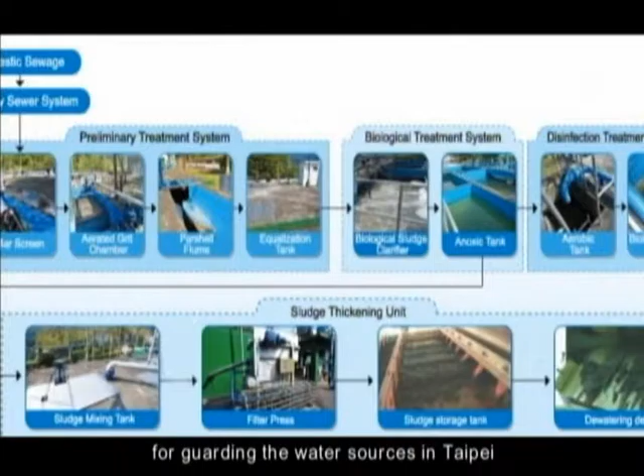However, human activities and civilization imperceptibly impose a burden on natural circulation. Thus, the sanitary sewage produced by us people has to be treated through artificial methods. The sanitary sewer system efficiently collects domestic sewage to have it treated in the sewage treatment plant and restores its cleanness for effluents. The Sindian Wulai area is an important line of defense for guarding the water sources in Taipei.

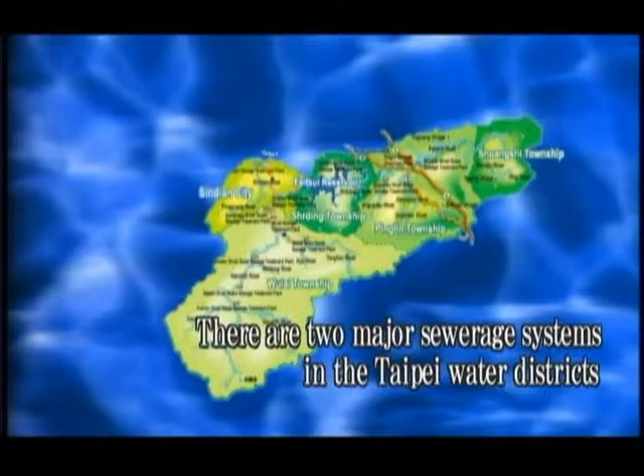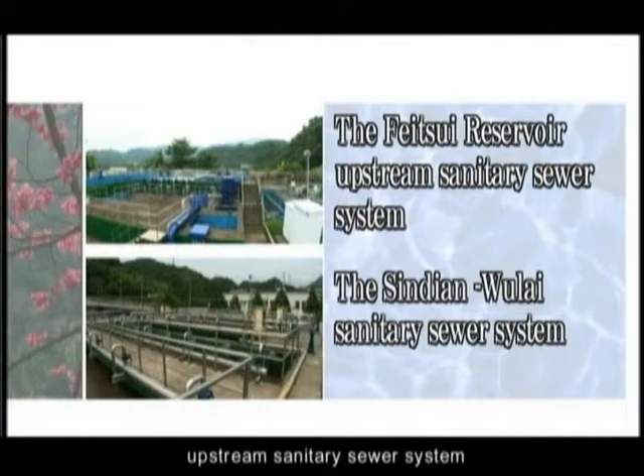There are two major sewerage systems in the Taipei water districts, divided by the Feitsui Reservoir. One is the Feitsui Reservoir upstream sanitary sewer system, and the other is the Sindian Wulai sanitary sewer system.

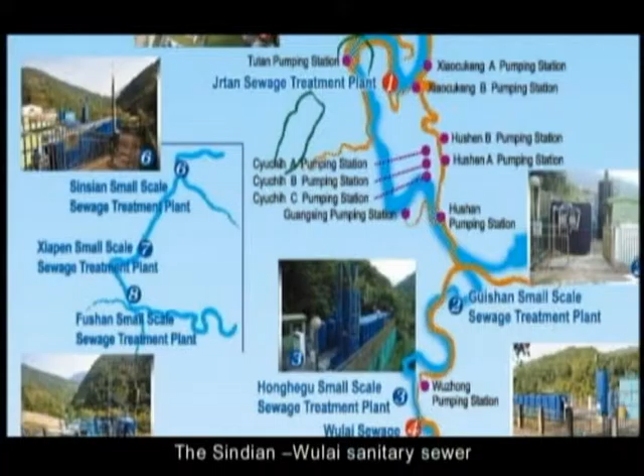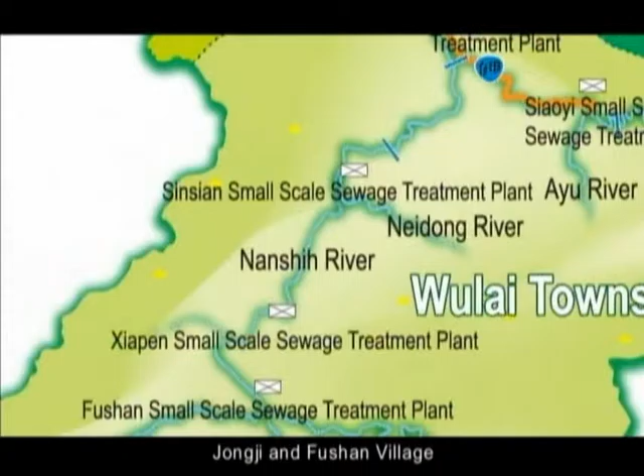The Sindian Wulai sanitary sewer was completed in 1996. It includes several villages in Wulai Township, namely Wulai, Sinsian, Siaoyi, Jongji, and Fushan Village. It also includes some villages in Sindian City, including Tutan, Cyuchih, Cukeng, Guangsing, Guishan, and Jrtan Village. It covers about 38,000 hectares and serves a population of around 16,000 people.

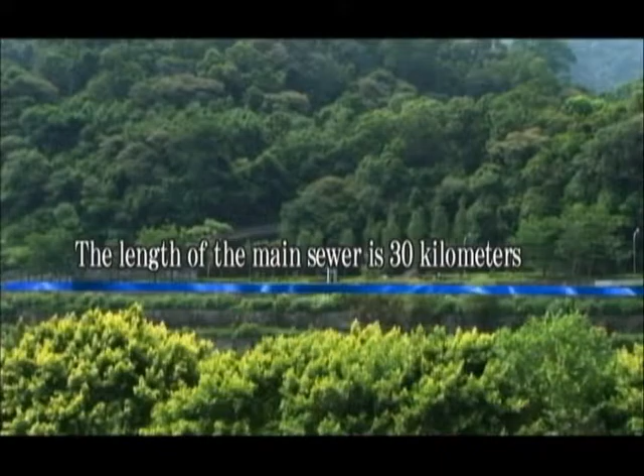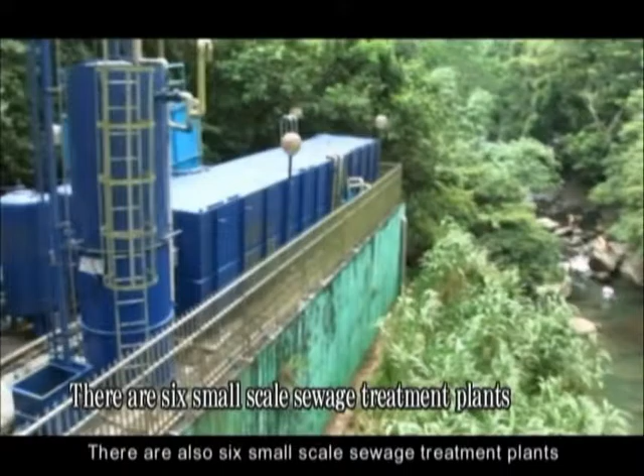Until 2009, the length of the main sewer is about 30 kilometers, and the length of the house sewer is about 33 kilometers. The facilities include 39 small lifting stations, 13 large pumping stations, and 2 large-scale sewage treatment plants. There are also 6 small-scale sewage treatment plants in the remote areas or scattered housing areas.

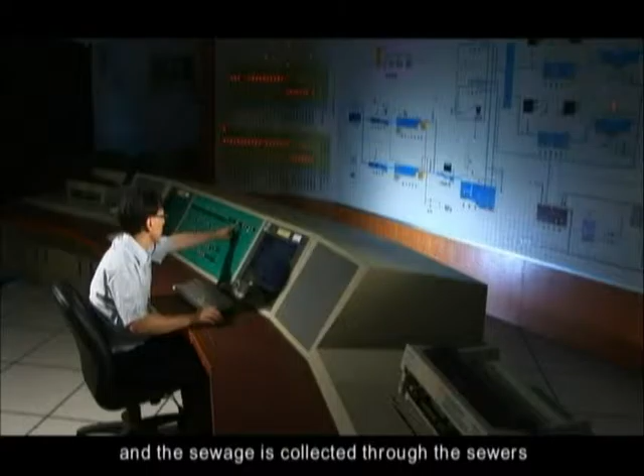The sewage treatment plant has been contracted to specialists for maintenance since 1996. The area covers the residential areas along the Nanshi River, and the sewage is collected through the sewers and is sent to the sewage treatment plant for treatment. After being treated in the secondary sewage treatment plant, the water regains its clarity from muddiness.

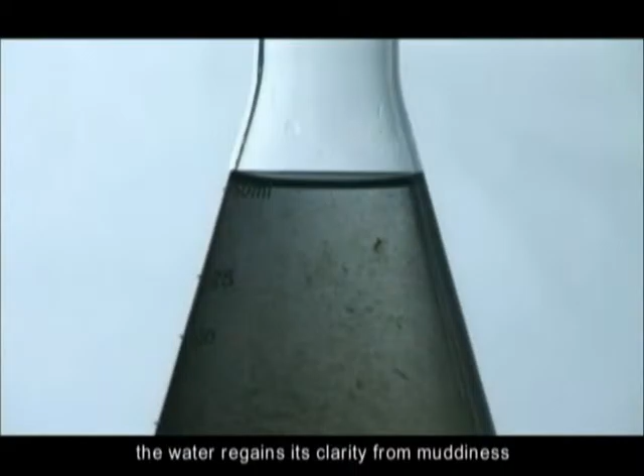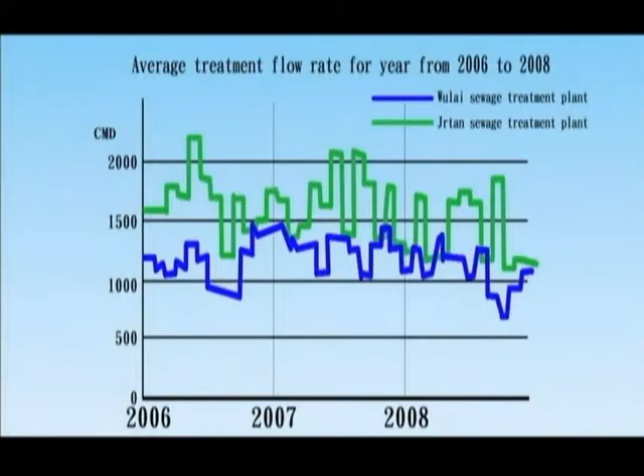It then goes through an effluent pipe to be released to the downstream of the Xindian River by Bitan Bridge. During 2006 and 2008, it treated an average of 2,628 cubic meters daily, equivalent to the water quantity in a standard swimming pool.

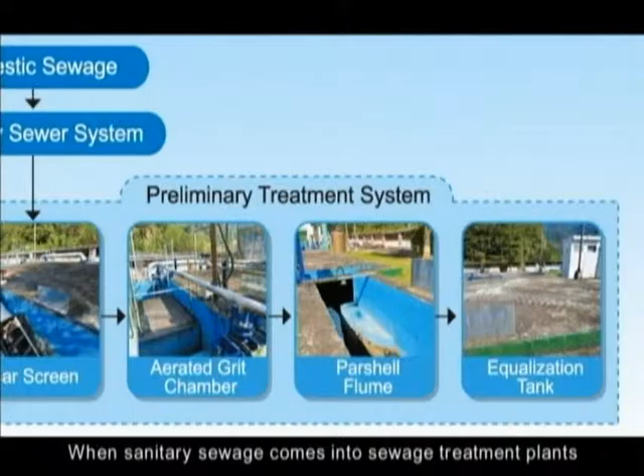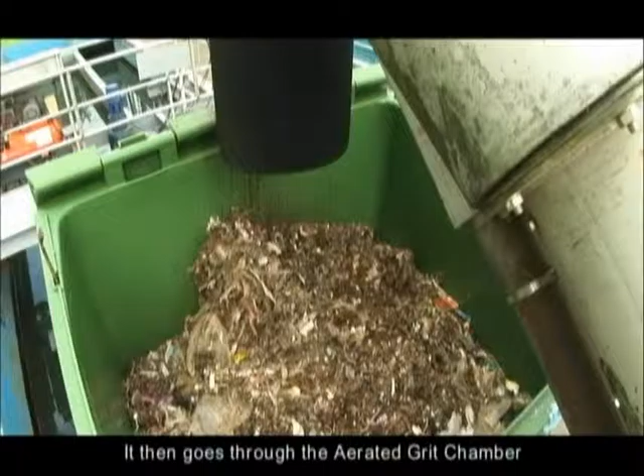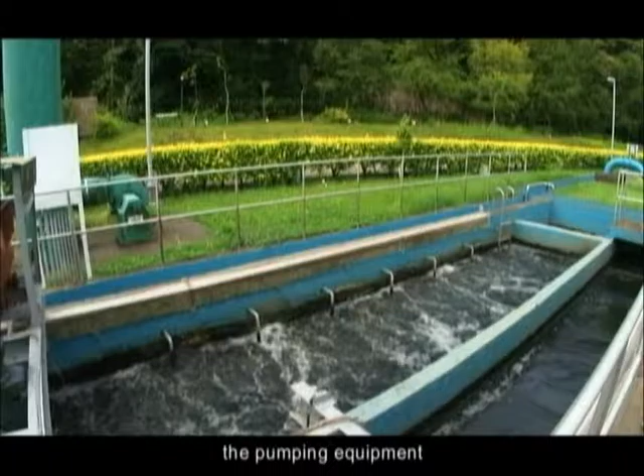The following explains the process of sewage treatment. First of all, the primary treatment. When sanitary sewage comes into sewage treatment plants, it first goes through the mechanical bar screen, which screens out larger miscellaneous objects. It then goes through the aerated grit chamber, further screening out suspended solids, grit and grease. This process is designed to avoid damaging the pumping equipment or secondary biological treatment equipment, and further increase the lifespan and efficiency of this equipment.

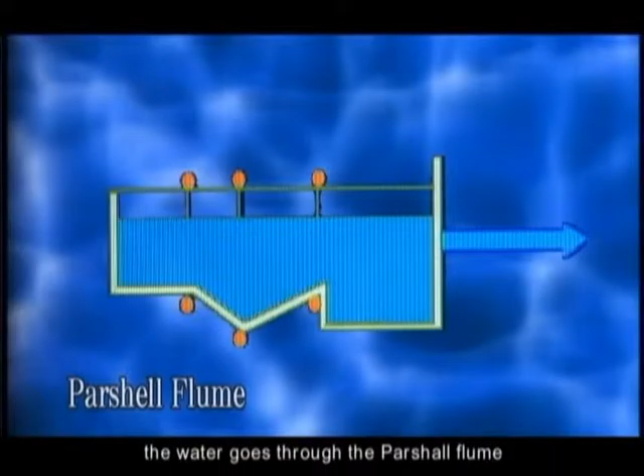The bar screen and grit chamber are two major guards which protect the sewage system. After that, the water goes through the Parshall flume. Next, the water goes through the flow measurement tank, measuring the instant sewage flow. Afterwards, chemicals such as chlorine, coagulants and coagulant aids, among others, are added based on the measured amount. Sewage flows into the equalization tank for equalizing the quality and quantity.

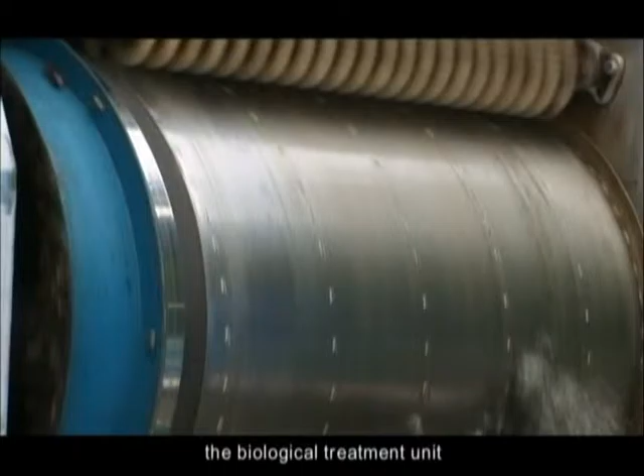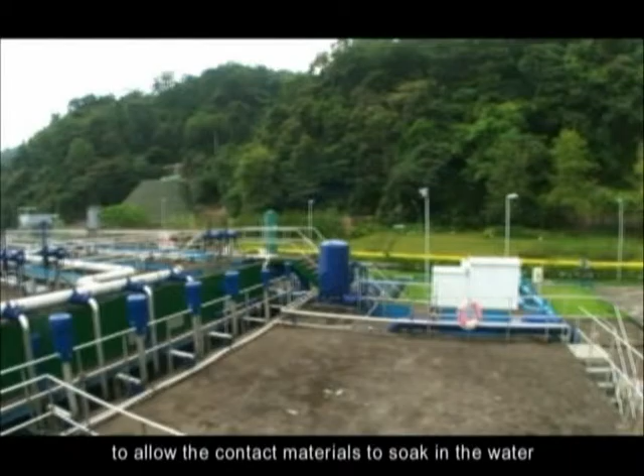Once the influent is steady within the affordable load, it moves to the most important process of purification, the biological treatment unit. The biological treatment unit is also called the secondary treatment unit. This unit adopts the contact aeration method to allow the contact materials to soak in the water and to aerate adequately. It helps stir and circulate the influent sewage, which facilitates the contacts among the contact materials.

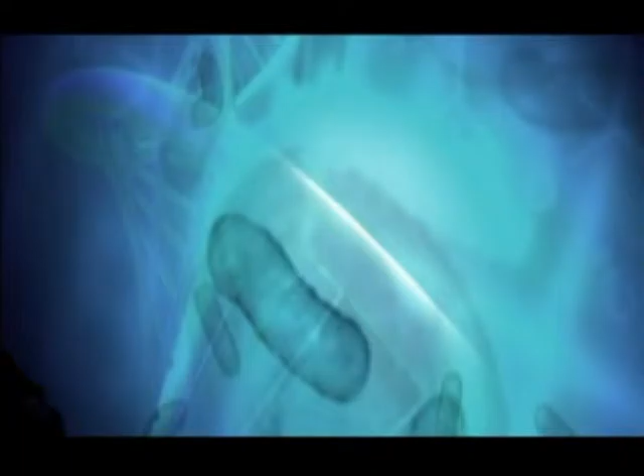Simulating the self-cleaning process of water in nature, this is to allow the microorganisms to uptake the organic matter in the sewage, so that sewage becomes clean water. Additionally, it is even better with artificially intensified water purification technology. The sanitary sewage pumped from the first unit, the equalization tank, is led to the secondary treatment unit and is mixed in the aerated tank.

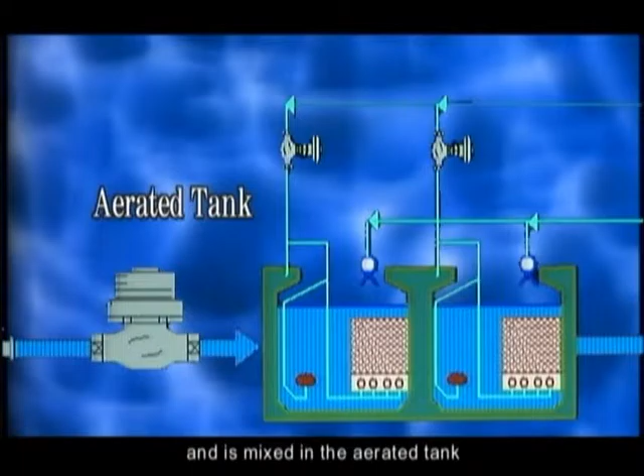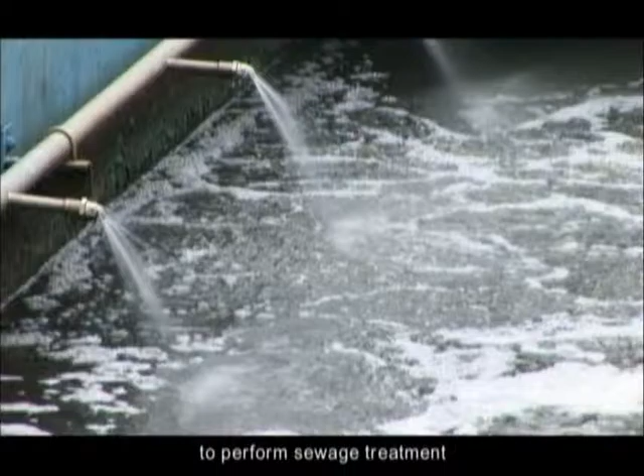The aerated tank uses the contact aeration method to perform sewage treatment. This tank keeps the sewage for a certain time so that the aerobic microorganisms can absorb the demanding oxygen. It also allows sufficient contact between sewage and the microorganisms for mixture.

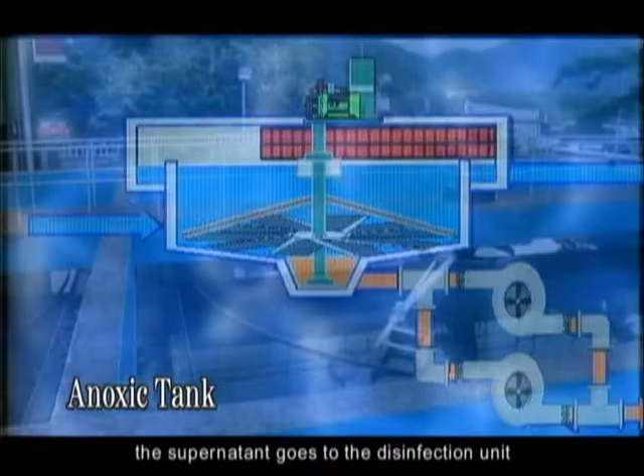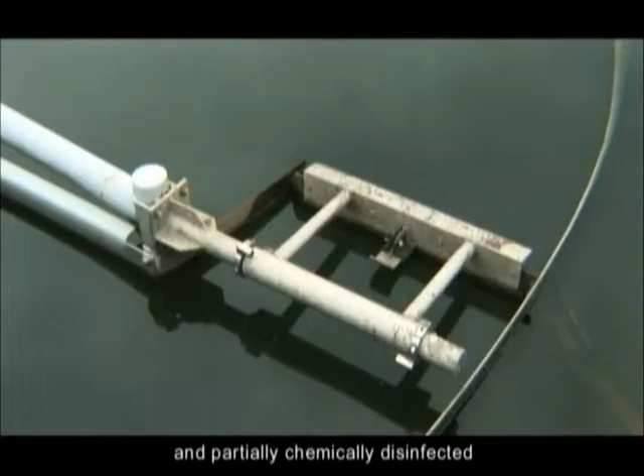The sediment tank separates the liquid and solid objects. The supernatant goes to the disinfection unit, and the settled solid objects go to the sludge treatment unit. The sewage is being biologically treated and partially chemically disinfected so that it conforms to the National Effluent Standard.

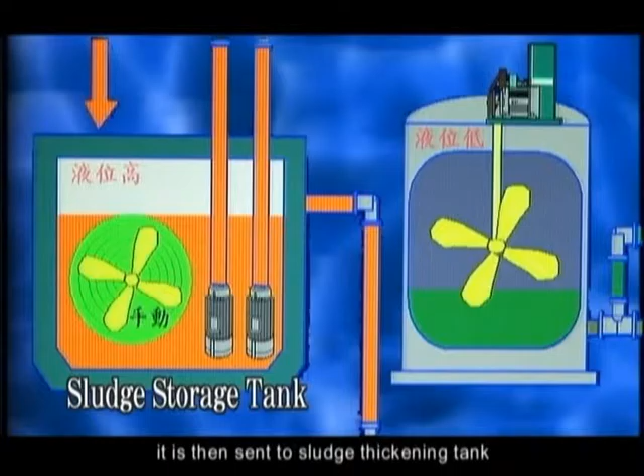The sludge produced in every treatment unit is pumped to the sludge storage tank. It is then sent to the sludge thickening tank. Sludge cakes are delivered regularly to the landfill site or are reused as raw material for brick sintering.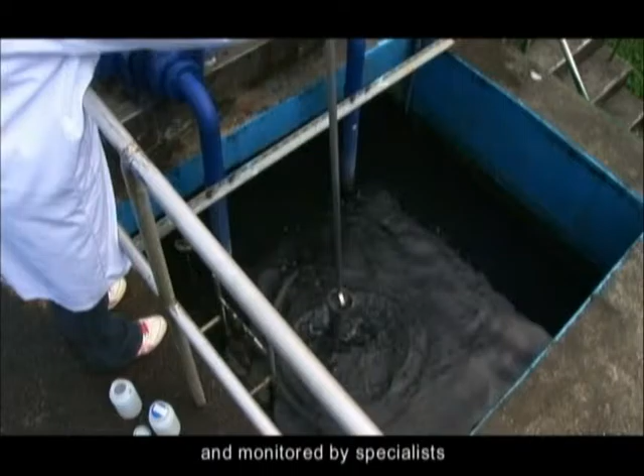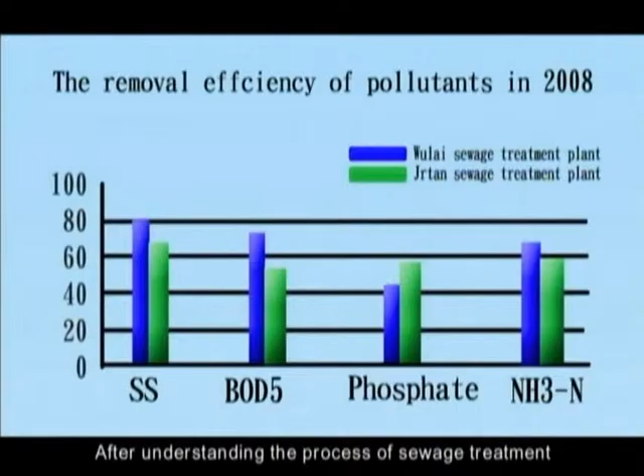The process of sewage treatment is inspected regularly and monitored by specialists to ensure the clarity and quality of treated water which conforms to the effluent standard. After understanding the process of sewage treatment, we can appreciate more about the origin of natural flowing water. Every drop does not come easy at all.

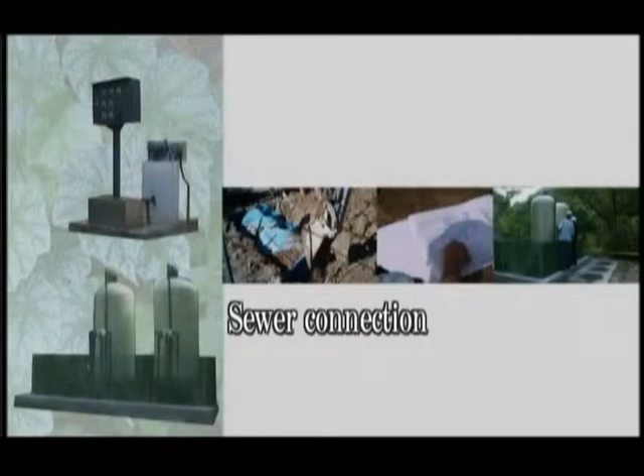To serve some residents in remote areas or those who cannot get sewer pipes connected easily, and to increase the treatment efficiency, as well as to ensure the purification and the quality of water within the Water Resource District, we have implemented sewer connections since 2005 for those houses that have not been included in the sewage treatment system.

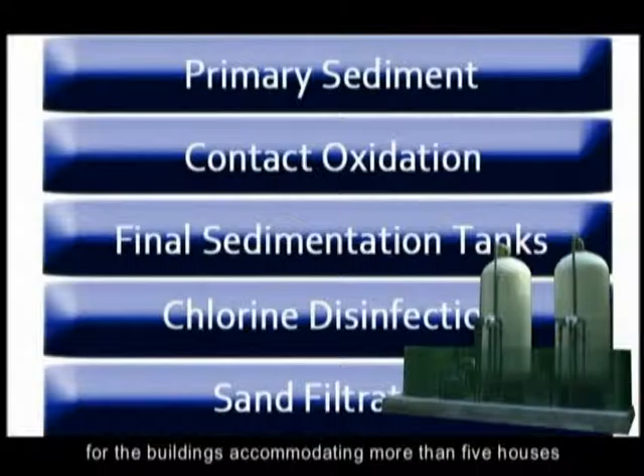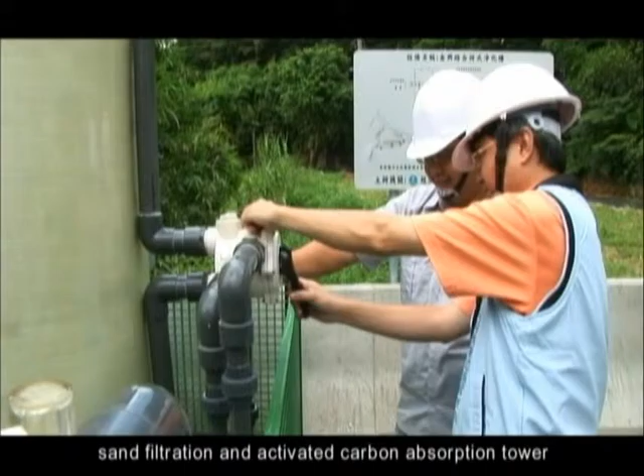For houses that are not able to have pipelines installed, but if there are more than 5 houses accommodated in the building construction, they can be managed as a special case. The sanitary sewer treatment facility for the buildings accommodating more than 5 houses uses the process of primary sediment, contact oxidation, final sedimentation tanks, chlorine disinfection, sand filtration, and activated carbon absorption tower in order to meet effluent standards before disposal.

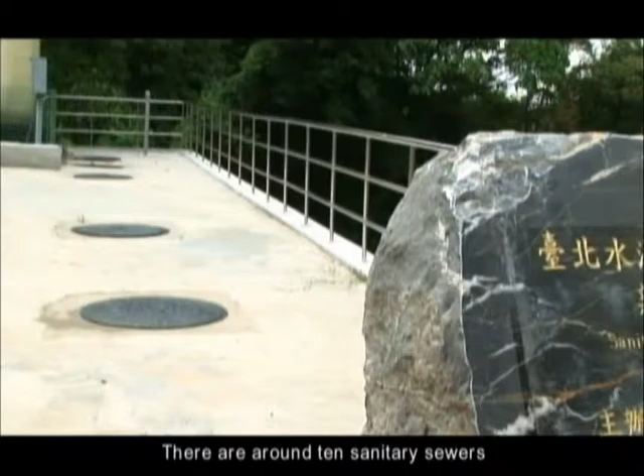Scattered houses will be handled by a smaller-scale sanitary sewer in a single building. Also, the quality of the effluent water from our district contains higher concentration of total phosphates and BOD. It mainly uses coagulation sedimentation process to eliminate total phosphates before disposing the effluent. There are around 10 sanitary sewers for the buildings accommodating more than 5 houses, and about 150 small sanitary sewers in single buildings in the Xindian-Wulai area.

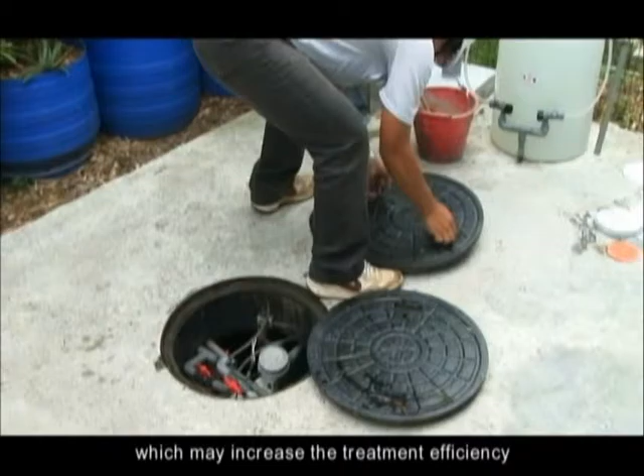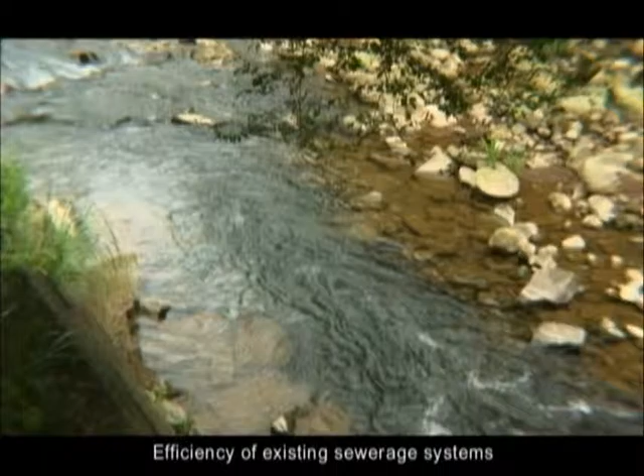Sewer connections are expected to be completed in 2009, which may increase the treatment efficiency in the Xindian-Wulai area from 71 to 79%, as well as increase the operating efficiency of existing sewerage systems. Sewer connections can also reduce the cost of drinking water purification, as well as guarantee the quality of the water that is offered to over 5 million people in the metropolitan Taipei area. Furthermore, it upgrades the living quality and standard in the Water Resource District.

The Taipei Water Management Office of the Water Resources Agency, Ministry of Economic Affairs, believes that only by good sewage treatment and water conservation can the upstream, midstream, and downstream possess the perspective of beautiful mountains, beautiful water, and beautiful life. We communicate genuinely with every township and village in the district, attaining mutual understanding and transferring new technology. We make all the efforts to fulfill development and work towards the perspective of a beautiful and sustainable environment.

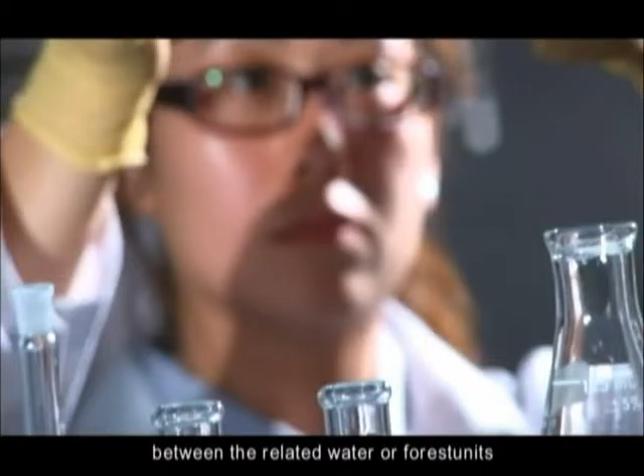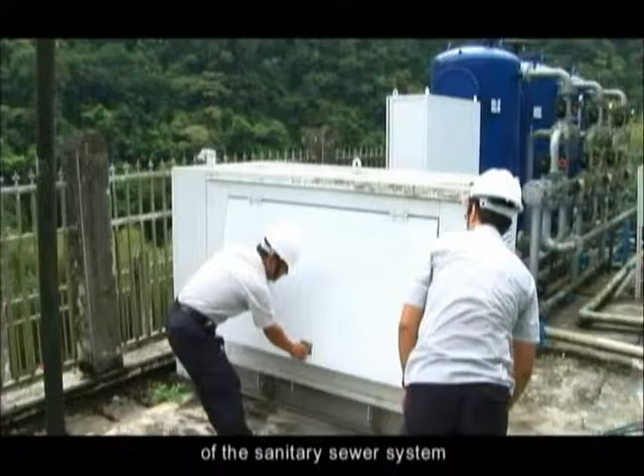We also actively act as a coordinator between the related water or forest units, reaching mutual understanding and offering support to each other. For the sake of protecting nature, we are doing our best to maintain the efficiency of the sanitary sewer system. Moreover, we strengthen industrial and education cooperation, hoping to gain the best management strategies by consulting a variety of fields. Our goal is not only to have a pure water resource, but also to keep the habitat for forests, animals, and plants as primary as possible. That is the best solution for us to coexist with nature.

The sanitary sewer system can efficiently assure the purification of water resources. It is also the key that connects cleanliness in the community with the citizens' living standards. Therefore, it is not only one of the most crucial environment indices in international communities, but also a necessary facility for modern metropolitan cities.

Our measurements include all the tasks of maintaining the cleanness of water resources, the preservation of natural resources, and the coordination of mutual development in community societies. We also adopt active management replacing inflexible management in order to achieve sustainable management in all aspects. However, it is a heavy responsibility. Everyone, from upstream to downstream, including people of all ages and every walk of life, needs to know the appropriate knowledge of water safety. The endless running streams, from the mountain spring to our home, require us to conserve this precious water with a most genuine heart.